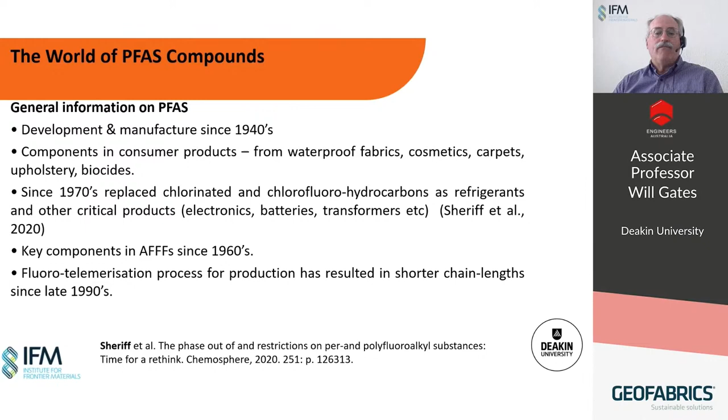PFAS have been manufactured and used since the 1940s. They are amongst the post-war wonder chemicals, and many aspects of modern society's creature comforts rely on PFAS. Since the 70s, PFAS have largely replaced chlorofluorohydrocarbons as refrigerants and in other critical products. As we're all aware, they have also been key ingredients in aqueous film forming foams for suppressing and controlling petroleum fires. Lately, since the 90s anyway, the shorter carbon chain length forms have become more prevalent, due to changes in production.

Widespread production and use and the long-term environmental lifetimes of PFAS mean that PFAS can bioaccumulate and biomagnify. Legacy production of PFAS and its use remain key ongoing exposure sources.

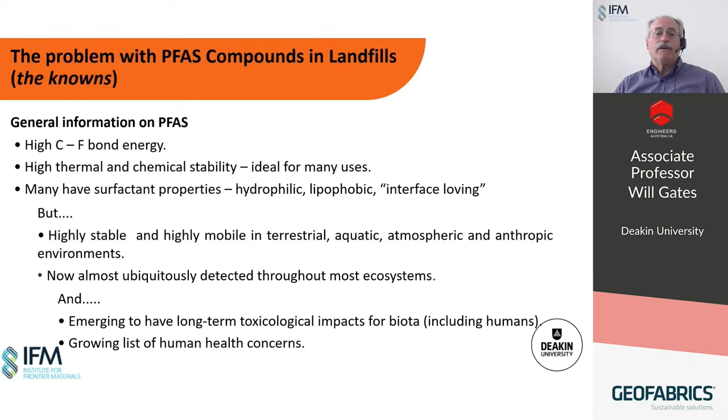The properties of PFAS compounds, which have made them useful across a broad range of consumer and household products for many years, including the carbon and fluoride bond strength, thermal and chemical stability, and surfactant properties of PFAS, also make them long-lasting, very mobile, and nearly ubiquitously present across terrestrial, aquatic, atmospheric, and anthropic ecosystems. These same properties also make them of concern for their toxicological impacts on the environment and on human health.

Listed here are some of the more common PFAS compounds. Solubility is generally in the part per million to part per thousand range. pKa's are generally strongly acidic, meaning that most of the PFAS compounds are present in their anionic forms in most environments. The pKa is basically the pH at which half of the PFAS compound is in its free acid form and half of it is in its anionic form at equilibrium. The critical micelle concentrations generally are higher than their environmental concentrations.

Notable exceptions to that rule are PFOA and PFOS, which are all ingredients in AFFFs. The CMC is the concentration at which PFAS will partition into its own phase, and so this has a big impact on its ability to form films as well as to be present in interfaces.

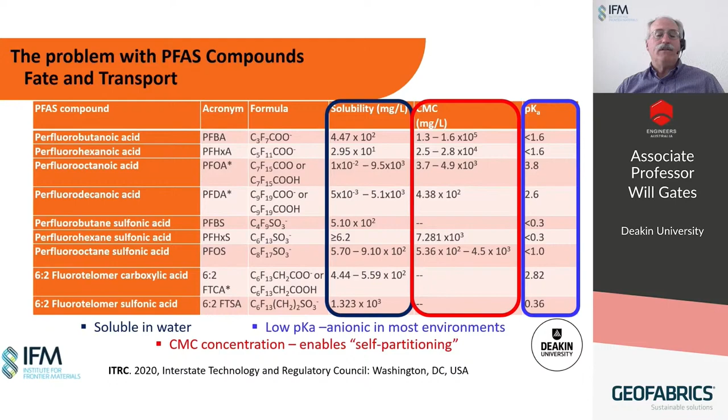In most cases, we can expect the PFAS to be highly mobile and ubiquitously present in its anionic form in most environments. Those environments preclude its adsorption and basically maximize its mobility.

Shown here is a schematic on the interplay between the various ecosystems or the environments in which PFAS are known to have an impact. While regulation has reduced the direct source pollution of PFAS into the environment, considerable PFAS transfer still occurs via our built infrastructure, collectively called the anthrosphere or the anthropic environment. So as scientists, it's our duty or our task to ensure that landfills and other systems within our control are effective in minimizing the further transfer of PFAS into the terrestrial, aquatic, and atmospheric ecosystems.

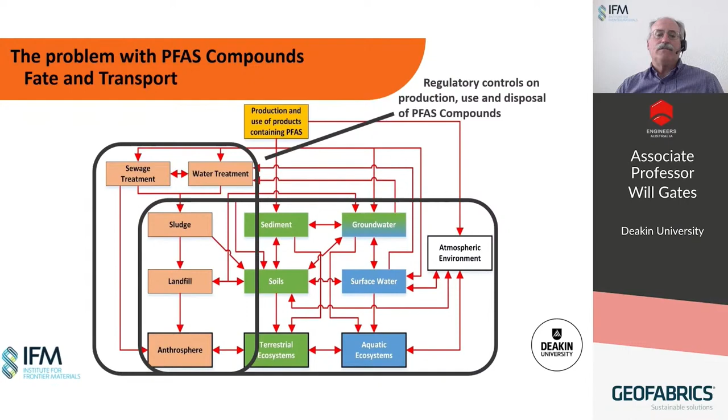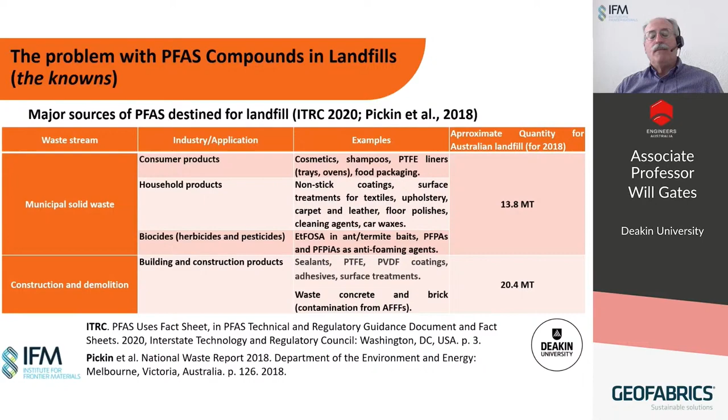Modern consumer and household products are large contributors to PFAS in landfill. For example, in Victoria, upholstery and vehicle interiors are really important sources. Building and construction products, such as sealants and waterproofing, make up most wastes that contain higher amounts of PFAS. In construction areas, concrete and brick wastes are usually contaminated by PFAS and thus can become a source of PFAS in the landfills themselves.

The concentrations of PFAS observed in Victorian landfills hold generally true across Australia as well. These relatively recent findings compare the operating landfills with closed landfills and with different waste streams. The age of the landfill and whether or not it is operating are both highly relevant with regards to the potential for PFAS migration, and this basically reflects changes in PFAS production, use, and disposal in response to regulation.

So going back to that table, we can see that if we compare the operating landfills on the left with the closed landfills on the right, we see much higher concentrations of nearly all PFAS compounds listed across the board.

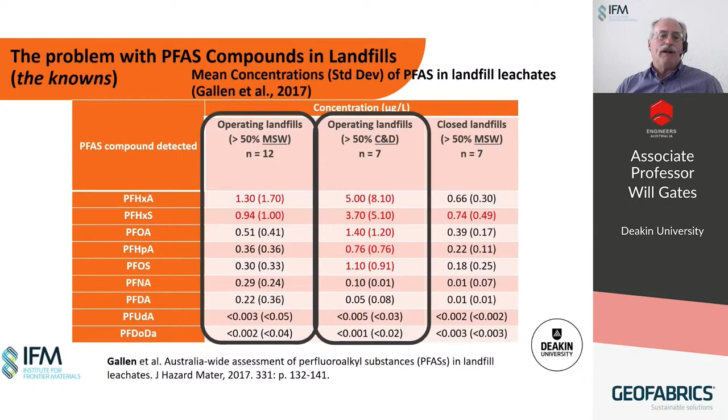We also can state that wastes that come from construction and demolition remain a main source of PFAS in landfills. Returning to that table, the center column, which shows the operating landfills accepting construction and demolition wastes, have much higher concentrations of PFAS than the operating landfills that accept municipal solid wastes.

Other important findings from these reports show that the associated chemistry of leachate is highly relevant for impacting PFAS migration. In other words, a high pH of leachate ensures that the ionic form of the PFAS dominates. If there's a high organic carbon loading in the leachate, either in the form of dissolved organic matter or particulate organic matter, then that will enhance the PFAS loading in the leachate.

So that brief overview tells us a little bit of what we know about PFAS and wastes and in landfills in Australia. How do we now begin to control their fate and transport? How do we keep them from getting into the environment further from the landfills?

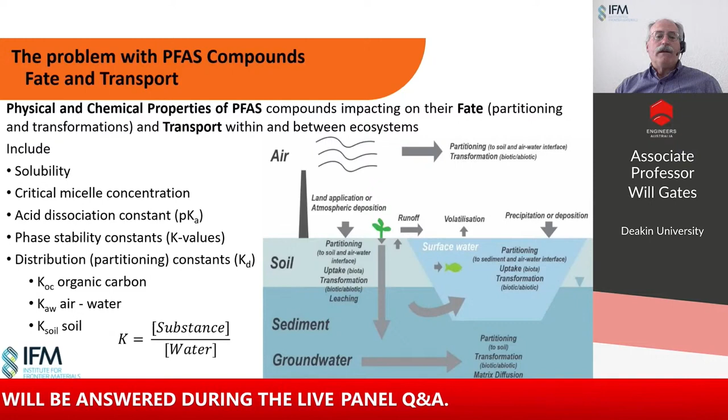In order to do that, we need to understand a bit more about their physical and chemical properties, such as their solubility, CMC and pKa, which we already have talked about, but also their equilibrium and stability and partitioning coefficients, and how these impact on their mobility at interfaces between phases and across these ecosystems.

For compounds like PFOA and PFOS, whose critical micelle concentrations and water solubilities are on a par, a key parameter for their partitioning and migration in the environment is their ability to concentrate at the interfaces. These interfacial micelle and hemimicelle films concentrate the PFAS at the interface, which then drives concentration-dependent equilibrium processes such as diffusion, adsorption, desorption, and partitioning to all the various phases.

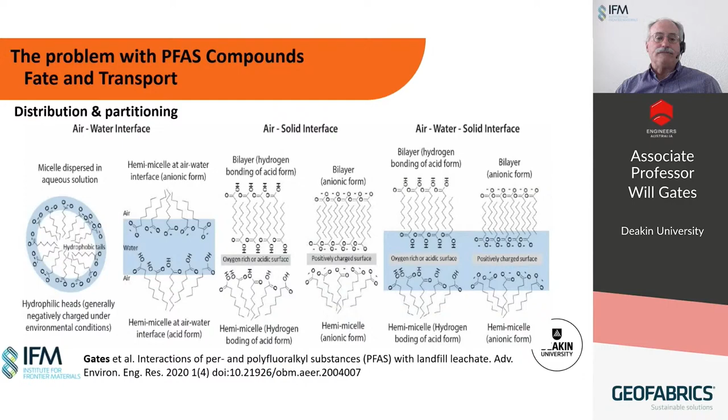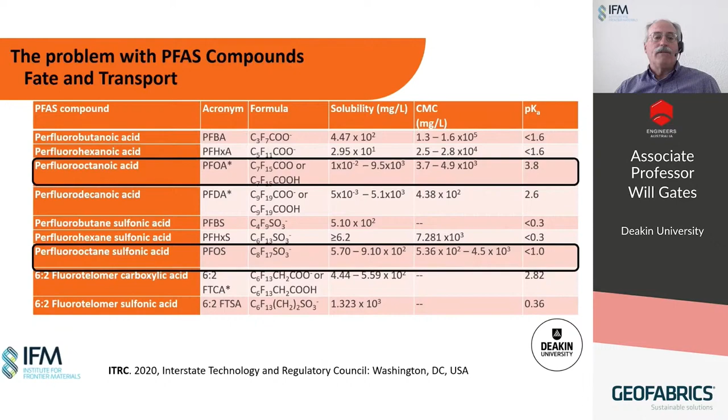And these mineral lining systems that we're going to now talk about include compacted clay liners and geosynthetic clay liners. So the main aspects of compacted clay liners that are important for their function are their mineralogy, their associated surface properties, their thickness, their density, their porosity, and their hydration status.

The mineralogy and surface properties, such as surface area, surface charge, and surface acidity, impact how the PFAS itself will interact. For clay minerals with a permanent net negative layer charge, such as bentonites or the montmorillonites within bentonites, the adsorption of PFAS is largely limited to cation bridging because they basically exist at concentrations below the CMC, but at pHs above the pKa.

Minerals such as allophane have a variable pH dependent charge, but a high point of zero charge, meaning the pH at which the net variable charge is zero is fairly high. So we can expect direct ionic interactions of the anionic forms to occur because the surface charge is net positive and the PFAS is predominantly in its anionic form. For example, allophane at pH 6 would be net positive, but most PFAS compounds would be anionic.

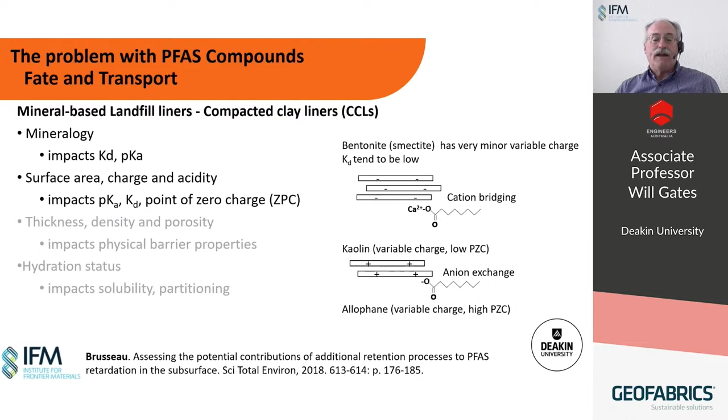Compacted clay liners should typically be a minimum of 600 millimeters thick, but the thickness only goes so far. Low saturated hydraulic conductivity is highly dependent on the compaction density and the low porosity that results from compaction, and that imparts a high degree of tortuosity on the liner system. Thus, the physical texture or microstructure of the liner is key to limiting the advective and diffusive transport of PFAS.

In general, this will only serve to retard the migration of PFAS, but not stop it. From purely physical transport to limit PFAS to 30 years or so, a compacted clay liner must have a saturated hydraulic conductivity in the low 10 to the minus 9s or lower, or have a thickness approaching 5 meters thick. I think you'll all agree that a 5-meter thick compacted clay liner is pretty much impossible, certainly not economic to produce for a landfill.

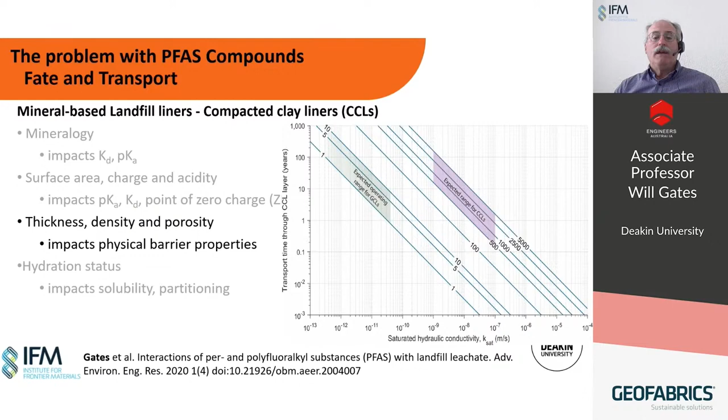However, for a geosynthetic clay liner, typical saturated hydraulic conductivities are in the 10 to the minus 11 meters per second. And if we can achieve that, as well as having a 10 millimeter thick liner, then we can achieve a 30-year retention time in that liner.

A final important consideration for mineral systems is their hydration status. Saturated conditions tend to promote the presence of PFAS in the water column and preclude its presence in the interfaces, at least in the interfaces with the mineral phases. Unsaturated conditions do promote those interactions with the interfaces. So water-mineral, air-water, and air-mineral interfaces become important for PFAS partitioning. However, the jury's still out in terms of how that is actually interacting and controlling PFAS migration.

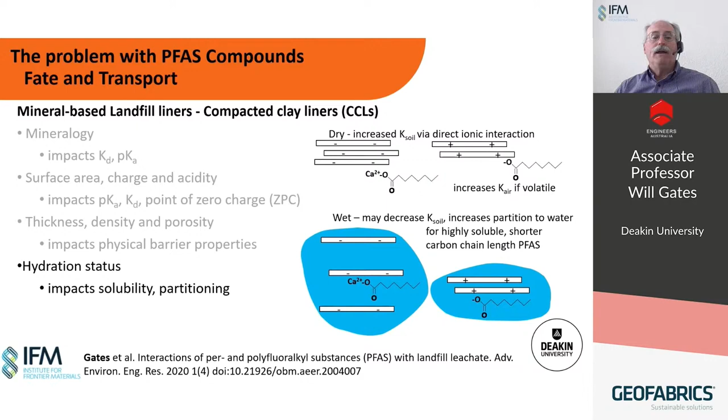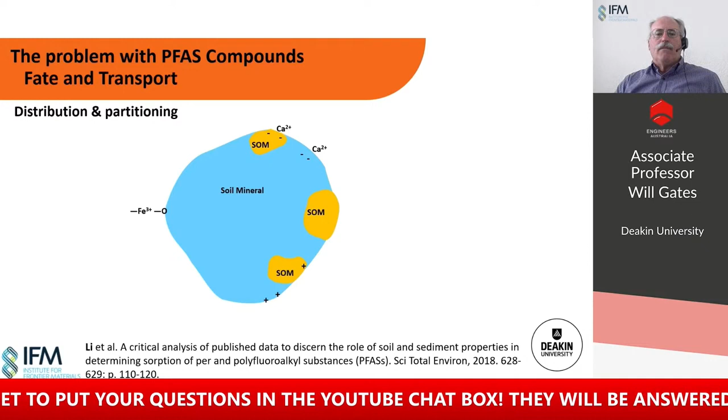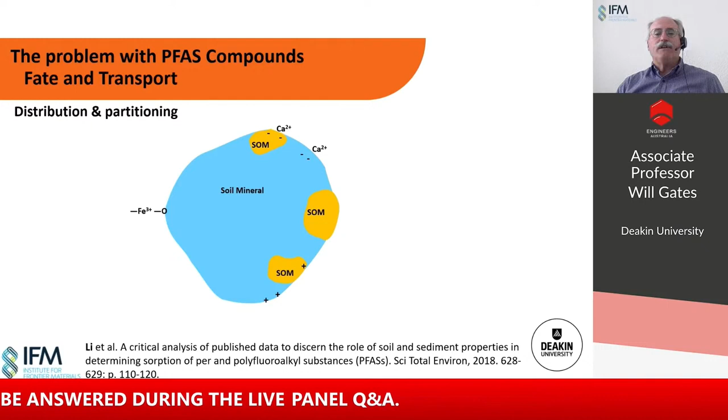Because organic carbon is present in many compacted clay liners in the form of natural soil humic materials, we can expect some interaction of the PFAS compounds with these. Soil organic carbon will have generally high cation and anion exchange capacities, a large pH range at which these variable charges can occur, and high surface areas and associated porosities that are all responsible for PFAS adsorption and retardation interactions in compacted clay liners.

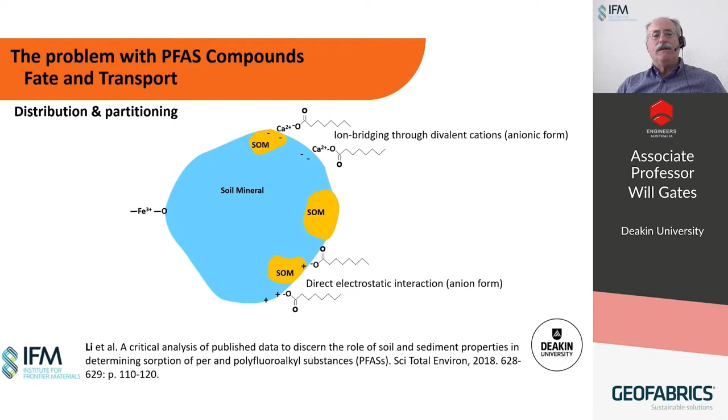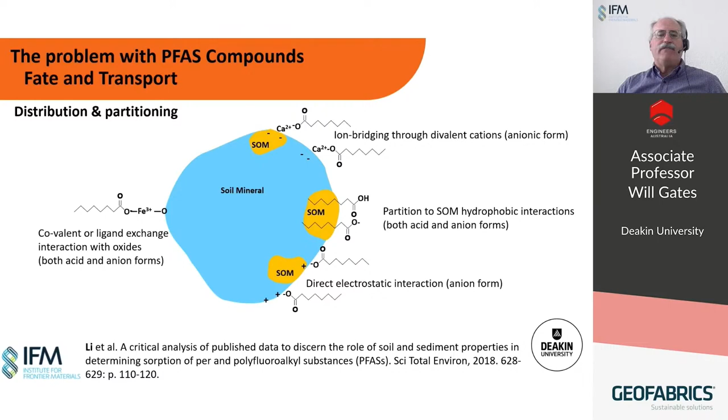The various forms of interaction result in ion bridging. So if there's a positively charged organic carbon, you can expect to see some ionic bridging, just as we saw for the positive mineral form. We also have direct electrostatic interactions, which would be important where the pH is above the pKa of the PFAS compound. In situations where the pH is not above the pKa of the molecule, other adsorptions such as phase partitioning interactions can take place. Covalent bonding, such as directly to surfaces, appears to be fairly rarely observed for PFAS compounds.

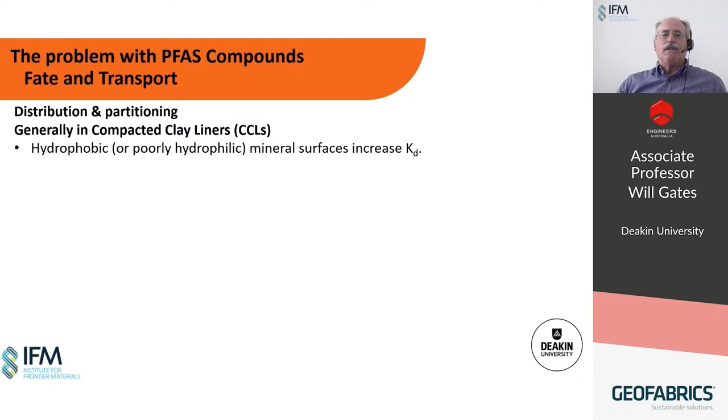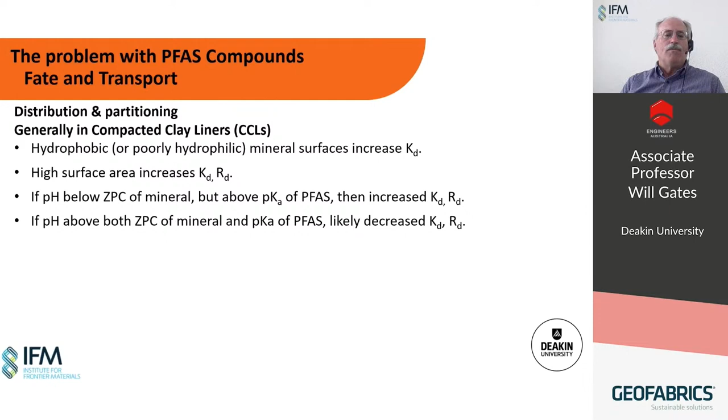So to recap, the physical and chemical properties of mineral surfaces impact the adsorption and thus the fate and transport of PFAS. If they're hydrophobic or poorly hydrophilic, or have a high surface area, we can expect the distribution coefficient will go towards the mineral surface, resulting in retardation. If the pH of the solution or leachate is below the point of zero charge of the mineral, we can expect the PFAS to be adsorbed if its pKa is low. If the pKa is high, adsorption onto the mineral surface will be lower.

We can expect that the actual thickness of the liner itself is going to be very important for prolonging transport time, just by virtue of the fact that we have a large amount of tortuosity, which is also related to the density and lower porosity of the lining system. Wetter lining systems will likely result in a decrease in partitioning to the mineral surface and an increase in partitioning of the PFAS into the water column. Drier materials, we'd expect the opposite, but the jury's still out because we don't really have enough information on that yet.

The presence of organic carbon in the mineral systems is very important. Basically, a thick, highly compacted, low porosity lining system with a high amount of variable charge minerals, including organic carbon, is going to be an ideal situation for PFAS adsorption.

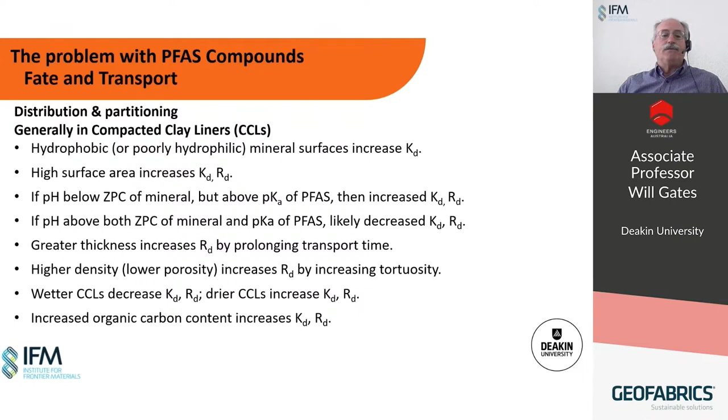Geosynthetic clay liners, though, are different. In a geosynthetic clay liner, you have smectite or montmorillonite as the main mineral component of the bentonite. We don't expect them to have a large impact on the adsorption and retardation of PFAS transport, certainly not much more than what we see for compacted clay liners. Our recent experiments basically show this to be the case.

The difference, again, is that our geosynthetic clay liners have a much lower saturated hydraulic conductivity because we can manufacture them in such a way that we have low porosity, high density, and a high tortuosity.

So what we found is with standard GCLs, we only have a minor retardation of PFAS. Part of this is because the tests are done under saturated conditions. If we actually conducted the tests under unsaturated conditions, we would expect to see a difference in the way PFAS is moving through the system. We don't have that information at this time yet.

If we modify the GCLs with organic carbon additives, such as activated carbon, we do observe some retardation of the breakthrough for the longer chain PFASs. We see a drop in the first few pore volumes of flow. However, if we look at the total PFAS loading, it increases again.

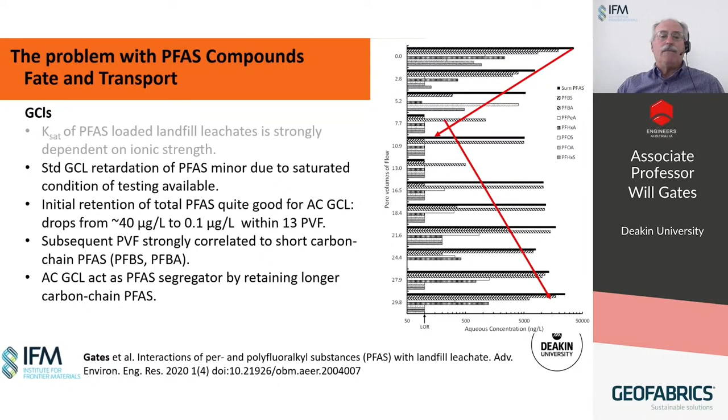This is going to be important for understanding when we design future landfills. I think it's really important at this point to point out that it's important to have landfill leachate collection systems associated with these types of lining systems. That brings us to the modern composite liner systems, which would take into account multiple barrier systems and leachate collection systems.

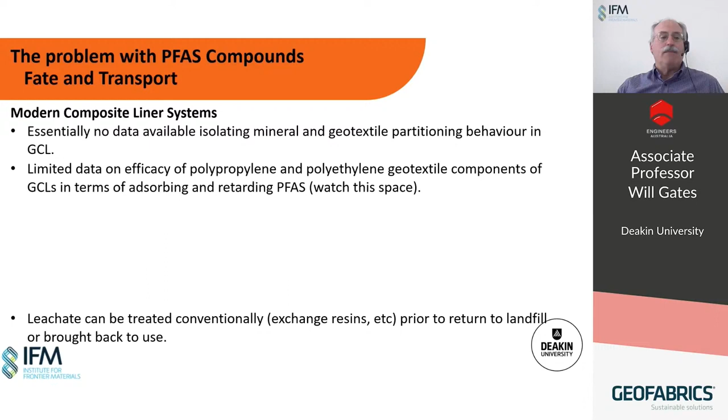There's still a lot of information we don't know about how PFAS migrate in the modern composite lining systems. We have limited data on the efficacy of the various plastics associated with geomembranes, for example, in retaining PFAS. Most of the lining systems that have been developed did not have PFAS in mind when they were developed. They do seem to have, for example, HDPE geomembranes do seem to have fairly good effectiveness. So we're at least lucky in that regard.

I think it's really important to point out that the geosynthetic clay liners and compacted clay liners should only be considered as secondary or even tertiary lining components in the protection of the environment against PFAS from landfill leachates. Again, reiterate that leachate collection systems should be advised, and we strongly advise double composite liner systems where the primary geomembranes and subsequent geosynthetic clay liner systems work in tandem.

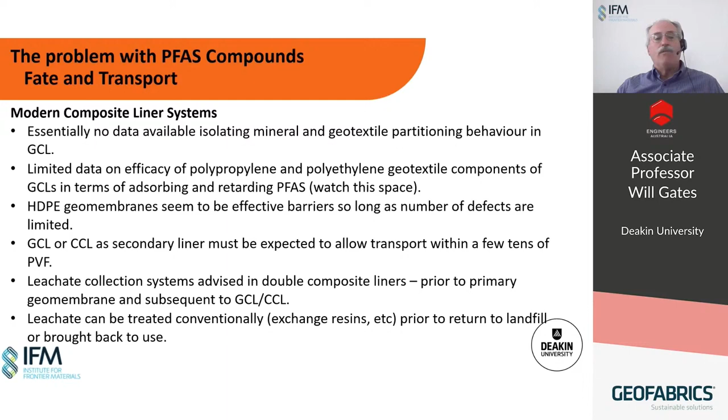The leachates in the leachate collection systems should also be considered to be treated for removal or destruction of the PFAS. So you're basically over time reducing the load in that landfill.

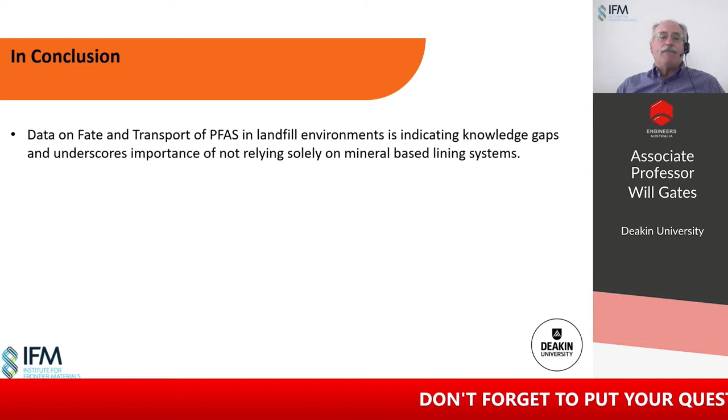So I guess in conclusion, there are many knowledge gaps that are still associated with PFAS migration through mineral liner systems. What we do know is that we should not rely only on compacted clay liners and geosynthetic clay liners for their retention of PFASs.

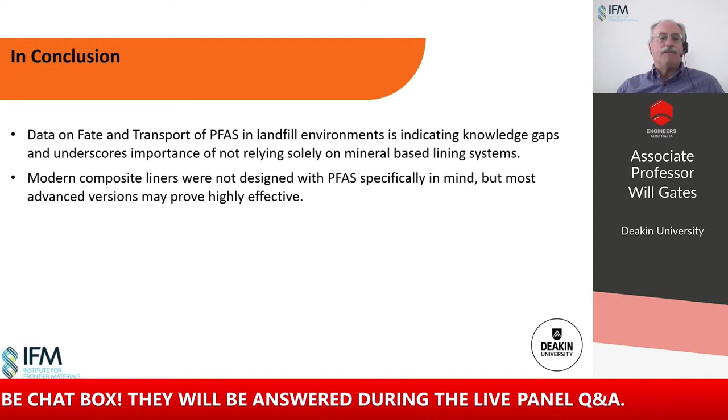Again, the modern liner systems were not designed initially for PFAS specifically in mind, but our most advanced versions may prove highly effective. The efficacy of the hydraulic barrier systems and the components for containing PFASs are expected to improve with further research and development.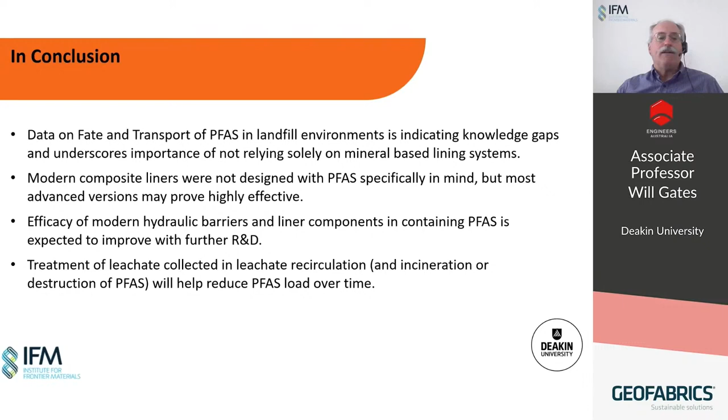Treatment of the leachate system should be considered, and given that PFAS compounds have a long half-life, I think we should also consider destruction of the PFAS that's collected from the leachate collection, rather than returning it back into the landfill itself.

The title of my presentation today is The Development and Performance of a Hybrid Geosynthetic Clay Liner for the Attenuation of PFAS in Landfill Leachates.

My name is Daniel Gibbs, and I'm the General Manager of Technical Research and Innovation at Geofabric's Centre for Geosynthetic Research, Innovation and Development, also known as the GRID.

Let's do a quick review of Per and Polyfluoroalkyl Substances, or PFAS. PFAS are a group of chemicals effectively made up of a fully or partially fluorinated carbon chain, or tail, and a functional head group. With the carbon-fluorine bond being one of the strongest in organic chemistry, some of the more salient properties of PFAS include being repellent to water and oil, and extreme thermal stability.

Because of these properties, a wide range of chemicals have been developed over the last 70 years, which have seen widespread application and proven quite useful to us humans, such as non-stick cookware, fabric, furniture, and carpet stain protection applications, food packaging, some industrial processes, and at least historically in Australia, some types of firefighting foams.

Unfortunately, because we're constantly exposed to a wide range of chemicals in our everyday lives, and because there are so many PFAS in existence, large-scale epidemiological assessments on individual PFAS are very challenging. What we do know is that generally, at least for the longer chain variants that have been studied, such as PFOA, they're very persistent. They can bioaccumulate and biomagnify through the trophic web. They've been linked to the development of certain cancers and have been nominated as endocrine disruptor and immunosuppressant chemicals.

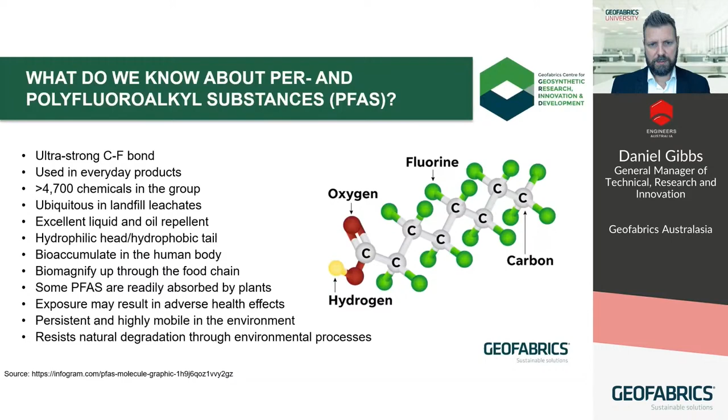Let's have a look at some of the ways PFAS find their way into the environment. They can be directly released from manufacturing sites using fluorinated chemicals in their processing, in agricultural crops irrigated with wastewater containing PFAS, aqueous film-forming foams, and consumer products containing PFAS like carpets, food packaging, ski waxes, etc., which ultimately find their way into landfill.

This is exactly the reason why we need to talk about PFAS in landfill leachate, with a specific focus on the performance of the lining materials used to inhibit the transport of these chemicals into the surrounding environment.

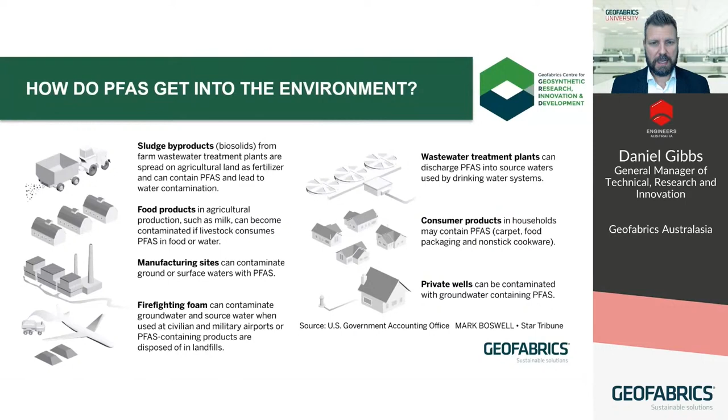Let's not forget the major exposure path for humans for these chemicals is ingestion, which includes consuming contaminated food or liquids, or simply breathing contaminated dust, which can accumulate inside our houses and offices, where we spend large amounts of time. So with all that incoming waste, which we saw in Will's presentation, we can see the necessity to generate some guidance around acceptable maximum limits for landfills.

This guidance now exists thanks to the development of the PFAS National Environmental Management Plan, or NEMP, currently in its second version, created by the heads of EPA in Australia and New Zealand. The document gives practical guidance around the maximum acceptable levels of the three most studied long-chain PFAS, with different levels applied to the different types of lining systems employed by the landfill.

Single composite lined landfills have a maximum leachable concentration of just 0.7 micrograms per litre in liquids, or a total concentration of 50 milligrams per kilogram in solids, for PFOS and PFHxS individually or combined, and up to 5.6 micrograms per litre in liquids, or again 50 milligrams per kilogram in solids, for PFOA.

Obviously, the acceptance criteria can be applied to bulk loads of relatively uniform materials, such as excavated soils, prior to acceptance by a landfill. But when it comes to MSW waste or certain C&D waste, pre-acceptance testing is virtually impossible.

So the only visibility we have on PFAS in these cases is to look at the levels in the leachate from the current waste stream. This is helpful in providing some lining design guidance for the construction of future cells and also leachate ponds.

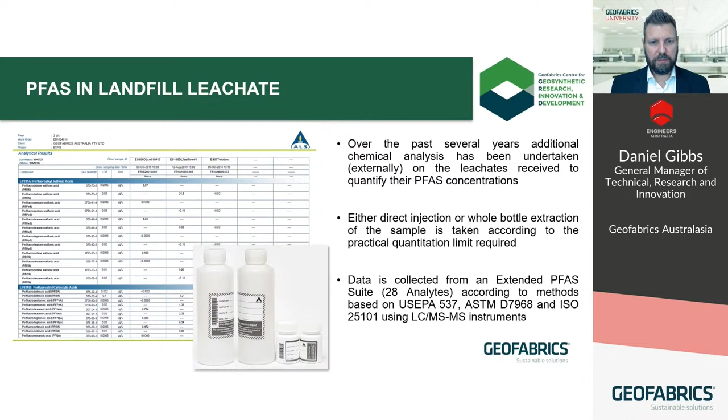Landfill leachate is a complex matrix of organic and inorganic chemicals which can make testing for these PFAS analytes a little more challenging than standard groundwater analysis. Still, there are a couple of standardized test methods employed, including direct injection or whole bottle extraction, depending on the matrix. Both of these give us a reasonably accurate picture of the amounts of PFAS in these liquids.

It's interesting to note that all but one of these leachates had higher than the maximum allowable levels of PFOS and PFHxS allowed by the NEMP for single composite lined landfills, but they were generally within the range for double composite lined landfill systems, which are a lot more expensive to build and CQA.

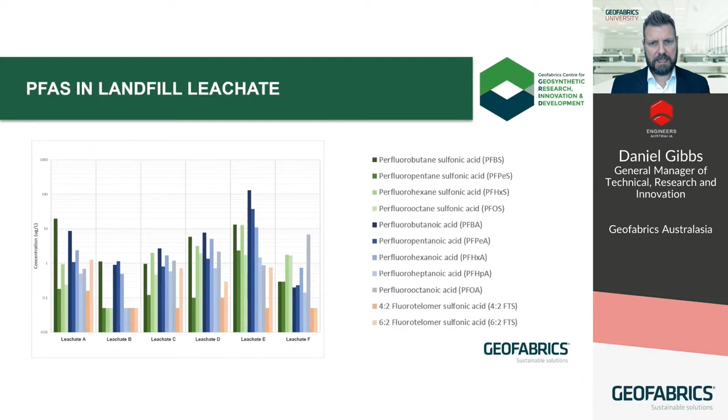Now, you may think, as a supplier of geosynthetic lining materials, this may sound like an opportunity, but what if we could design a single composite lining system which would reduce the PFAS levels passing through the system to below the NEMP acceptance criteria for single composite lining systems by simply changing one aspect of the system? Before we get into that, there are a few key things we need to talk about to provide some context around lining design.

Firstly, given that we know there is PFAS in our landfill leachates and that it can concentrate with time, looking after these landfills long-term is critical, with most environmental authorities requiring at least 30 years of post-closure care. By this point, for well-designed modern landfills at least, there should be little to no leachate generation.

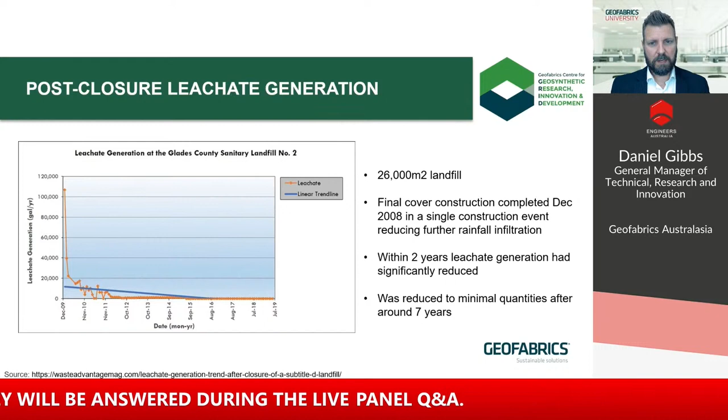The good news for landfill operators from a leachate collection and treatment point of view is that leachate generation has been shown to slow dramatically post-closure. In this specific example of a landfill in Glades County, Florida, leachate generation dropped significantly within 2 years post-closure and then fell to virtually nothing after just 7 years. Obviously this may not be the case for all landfills, but it gives us some general insight into how long leachate may need to be managed post-closure.

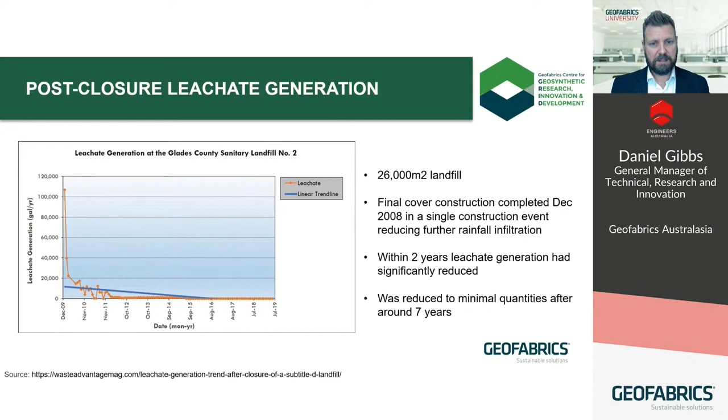This is an important point to consider when discussing the hydraulic head potential and timeline of the required performance of basal liners, and in particular GCLs.

Which brings us to the design of the lining system. In Australia, an accepted landfill liner and cap design includes a single composite liner consisting of either a compacted clay or a geosynthetic clay liner, overlain by a geomembrane. For critical applications, this system can also be doubled up. The improvement in hydraulic performance of a composite lining system over and above the individual components is well documented.

But what about the transport of PFAS? There's been some recent work carried out by researchers here and overseas, which has shown that while PFAS can form micelles, as we saw in Will's talk, at higher concentrations and reasonably readily diffuse through the amorphous regions of polyethylene geomembranes, diffusion may be very low for the concentrations we find in a typical landfill setting.

There's a body of work being undertaken at present here in Australia, which looks to quantify the effects of PFAS on lining materials such as HDPE geomembranes and GCLs. This includes not just looking at how these chemicals move through the system from a hydraulic point of view, but also any detrimental effects such as stress cracking, which may occur over time with exposure to PFAS, because it's a surfactant. But based on our current body of knowledge, let's assume that PFAS quantities in landfill leachate are low enough to reduce diffusion through HDPE geomembranes to very low levels.

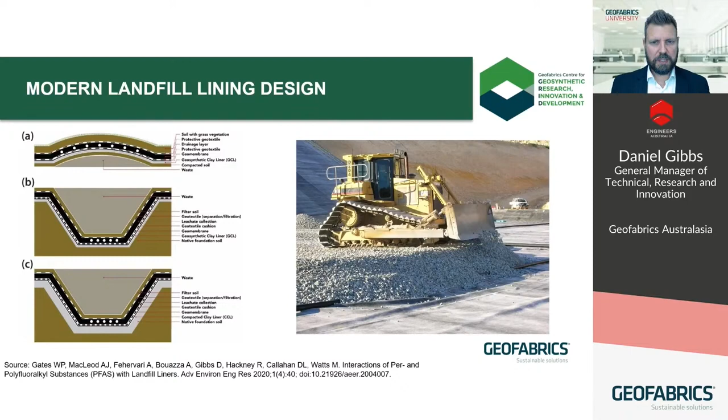That doesn't let us off the hook, though. What happens if the geomembrane has a defect or a hole? Then diffusive flux gives way to advective flux, and we now need to understand how liquids containing PFAS interact when in direct contact with the GCL components, in terms of the impact on hydraulic performance and whether or not these chemicals are trapped in the bentonite, which has a history of being generally pretty good at trapping certain contaminants like heavy metals.

We test the hydraulic performance of GCLs with deionized water to ASTM D5887, and the compatibility of many other solutions, including landfill leachates, with GCLs using ASTM D6766. These methods have specific set point values in terms of the confining and hydraulic head pressures, which interestingly were originally set with quality control in mind more so than around specific performance criteria in end-use applications.

The pressures were selected to ensure the specimen could be confined and back pressure saturated using a hydraulic gradient that would produce a flow so that measurements could be made in a reasonable time period for QC and commercial labs. These specific pressures were reached by consensus at the time and only meant for comparing one GCL specimen to another based on the standard.

This includes changes to overburden or confining stress, hydraulic head pressures, and the composition and concentration of the permeating liquid. So for example, while the confining pressure may be similar in a landfill cap, if you have a relatively medium to low permeability soil in conjunction with a geocomposite drainage layer over the geomembrane and a mild slope, your hydraulic head potential is reduced to almost nothing.

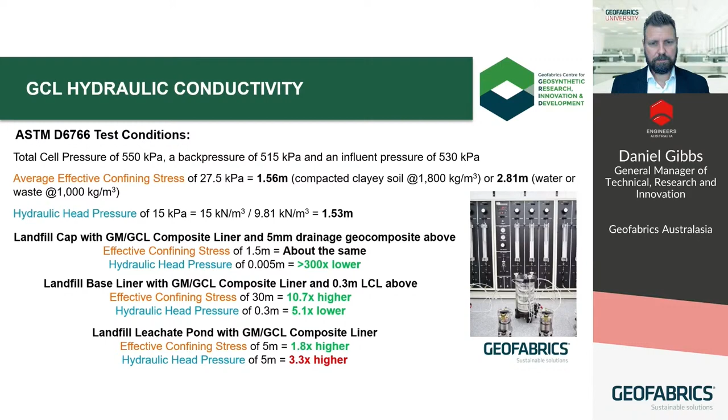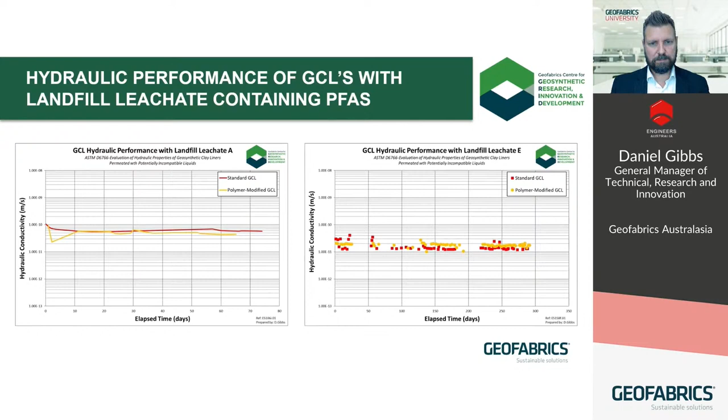These results are within the bounds of many of the Australian landfill leachates we've tested over the years. So hydraulically, at least, we see that the PFAS itself, at these microgram and nanogram levels, doesn't appear to affect these GCLs in terms of their hydraulic performance. But what about their ability to trap PFAS?

In some of our early research studies, we quickly discovered that the bentonite core, while it generally has a reputation for reducing contaminant transport due to its low permeability, couldn't trap these three specific long-chain PFAS molecules very well in either standard or modified forms.

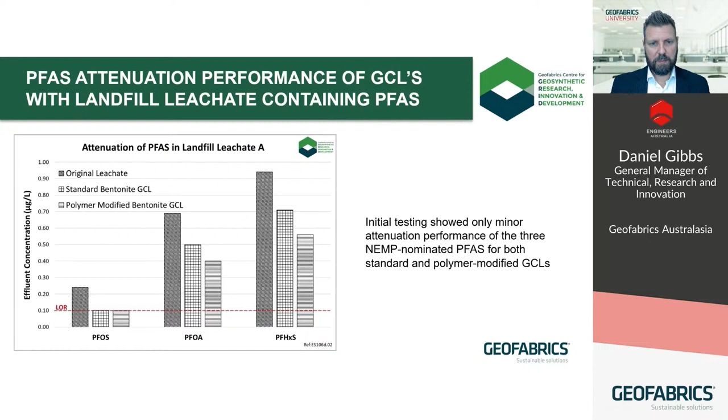Some of the uptake you see in these graphs, particularly for PFOA, could be linked to sorption onto the polypropylene synthetic components. We're investigating this further in a cooperative study with Monash Uni at the moment, so this could be included in a future webinar.

So really the question is, how do you trap PFAS? Well, there's a range of products available that can do this - ion exchange resins and other types of polymers. A number of these have been successfully employed by water treatment plants for many years.

One of them is activated carbon. Now, activated carbon is one of the most well-known and well-researched products available, with a proven potential to remove organic contaminants such as PFAS from liquids. It has a high affinity for hydrophobic compounds, which is why it works reasonably well to capture a range of PFAS given their hydrophobic tails.

Given the increased mobility of some of the shorter chain PFAS, one of the challenges with this product is that some activated carbons, at least, may not always effectively capture and hold onto some of these shorter chains to the same extent as the longer chain variants.

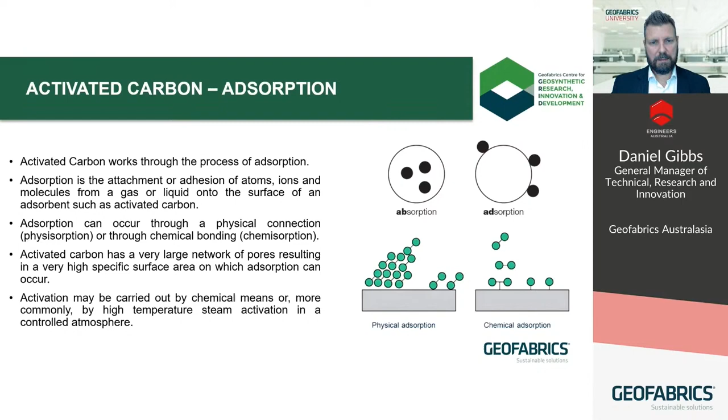So now we know how effective activated carbon can be. How do we select the most appropriate type?

Activated carbon can be made from pretty much any type of organic material, but ideally something with a high initial carbon content. Commercially, these are produced at scale from things like wood, coconut, and coal. You can also use waste materials such as apricot kernels and cherry pits. Different donor raw materials and to some extent different processing techniques result in different properties in the final product, such as specific surface area and porosity.

Porosity for these products is categorized in terms of their differing sizes, from tiny micropores less than about 2 nanometers in diameter, through to mesopores, which are between 2 and 50 nanometers, and macropores above 50 nanometers. Activated carbon made from wood generally has a larger number of macropores, while coconut shell-based activated carbon has a higher level of micropores. Coal is somewhere in between these two with a reasonably balanced porosity, having similar levels of each pore size. And this is an important distinction in the context of having a product which has the correct size and number of pathways required to maximize PFAS adsorption.

A further distinction is the type of coal used. Research by others has shown a higher PFAS attenuation capacity using bituminous coal over the younger lignite or older anthracite types.

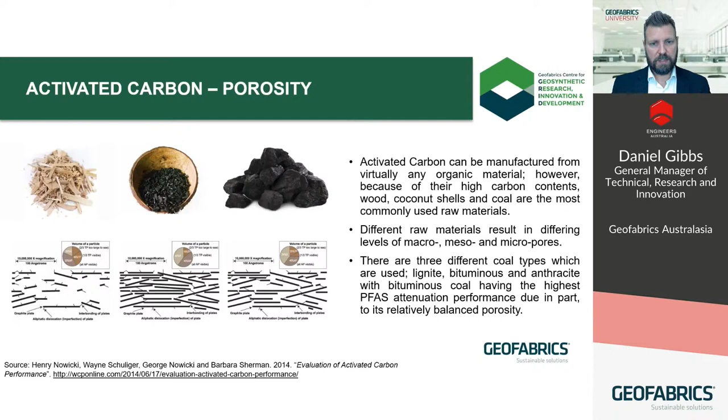So we selected a particular bituminous coal-based activated carbon, which had already been designed by the manufacturer to assist in the capture of PFAS molecules. And we recently carried out a kinetics and adsorption isotherm study through ADE to understand and really quantify the performance of the activated carbon in isolation of the bentonite component. We used a landfill leachate as the contact liquid because it had a range of potentially fouling co-contaminants, which are a very important consideration when looking at performance.

We looked at 2 different grades of the same product, one with a slightly lower overall surface area. The study involved things like reaction rates, equilibrium times using increasing amounts of activated carbon, desorption rates using pure water, etc. It's worth noting that the maximum addition rate of the activated carbon in this study was just 0.5 gram.

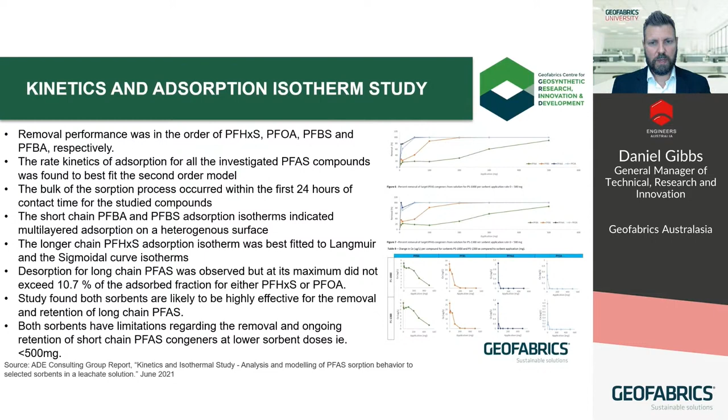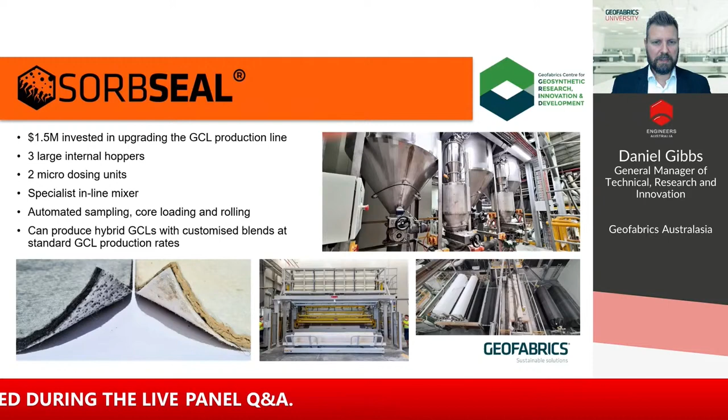So once we selected an activated carbon with the right properties and the right particle size, then we had to figure out how to manufacture with it. Prior to us spending around $1.5 million on upgrading the equipment, we ran several small laboratory trials and then larger scale online trials to qualify the product and the amount of activated carbon required to get that right balance between PFAS adsorption and GCL permeability using landfill leachates.

So when it came to designing the equipment, we knew how much activated carbon we wanted to have per square meter, how we wanted to mix it, and whether we wanted a selection of other potential materials to be added as the body of research around PFAS transport and materials science grew, both in our lab and generally around the world.

So we added 3 separate large hoppers for powders and also 2 special microdosing units for any polymers or other materials which we found to be effective in trapping long and short chain PFAS at low addition rates. We installed an automated sampling unit as well as a new core loading and rolling system. And this gave us a longer roll length capacity. And all of this really resulted in a great deal of future-proofed manufacturing and product design flexibility.

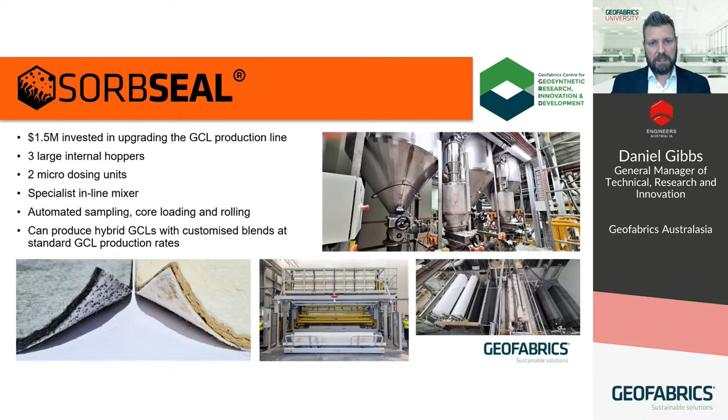The final result was a hybrid GCL product, which we named Sorbseal.

So if we now look at the long-term hydraulic performance over a few years, we can see a slight increase in permeability overall, but still in the 10 to the negative 11s. These particular Sorbseal GCLs had a typical addition of around 1 kilo per square meter of activated carbon and between 4 to 4.5 kilos of dry bentonite.

As I mentioned earlier, the PFAS in both leachates doesn't appear to have had a negative impact on the hydraulic performance. Going into this, we really wanted to preserve the permeability so that we remained within reasonable GCL leakage rates for design purposes, and we didn't want to disrupt the components of the GCL too much such that we'd need to rethink how we design with a completely new material or a certain aspect of the material.

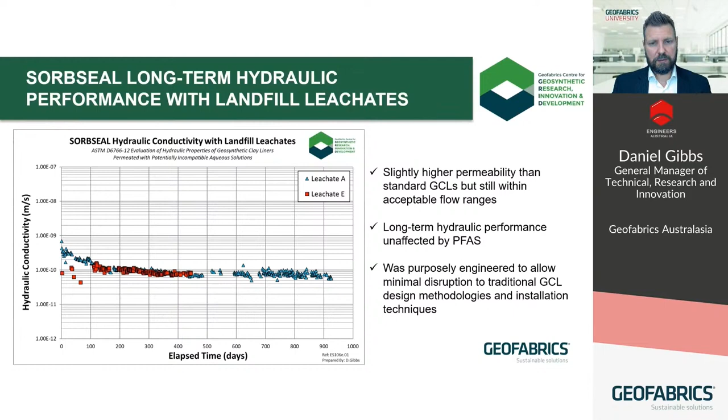So we know Sorbseal can retain good hydraulic performance over the long term in contact with landfill leachates, even with 1 kilo of activated carbon blended in, which is a non-swelling component. But how about the other critical aspect, the attenuation performance of PFAS over time?

Well, that was excellent as well, especially given that MSW landfill leachates are a chemical soup which contain a wide variety of co-contaminants alongside the PFAS, all competing for space on the surface of the activated carbon.

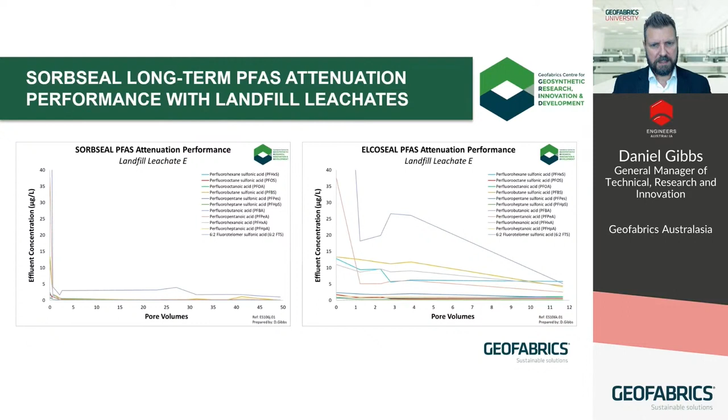The left-hand graph shows Sorbseal's ability to strip the leachate of a range of PFAS, both long and short chain, while on the right we can see the performance of a standard unmodified Elcoseal GCL without any activated carbon, showing some attenuation performance, but not nearly as efficient as the Sorbseal product.

So if we just focus on the three main long-chain PFAS nominated in the NEMP, we can see that Sorbseal is able to reduce the originally high levels of PFOS and PFHxS, which were outside even the 7 micrograms per litre maximum for a double-line system, to just less than 0.03 micrograms per litre after 50 pore volumes of flow.

Remember, this is permeated using actual leachate, and the conditions of the ASTM D6766 GCL permeability test method, representing 1.5 meters of simulated hydraulic head and a relatively low confining pressure.

This means that in the landfill baseliner and cap, where pore volumes through the GCL are likely to pass through more slowly due to either increased confinement and/or a lower hydraulic head potential, and the fact that leachate generation slows down dramatically post-closure, Sorbseal may very well continue to provide attenuation of PFAS both during the operational phase and for many years post-closure, even beyond the moment leachate stops being generated.

Naturally, this is dependent on the original PFAS concentrations in the leachate, the levels of co-contaminants, the other liner design elements such as the geomembrane, and how well these products were installed and CQA'd, etc. But the data certainly proves that it can be done.

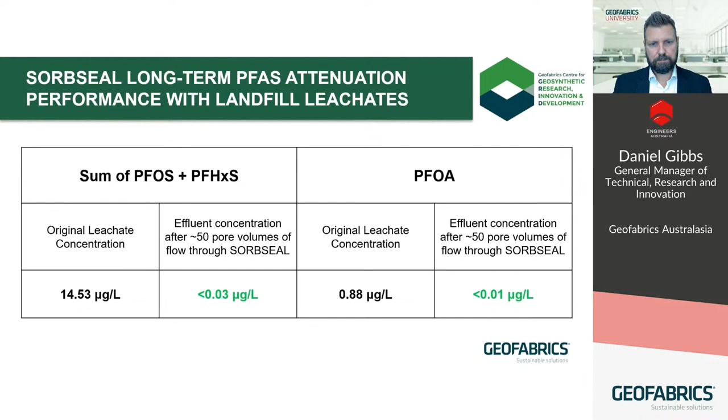And on the topic of CQA, let's take a look at the specification for Sorbseal S1000 and S2000 GCLs. As I mentioned earlier, we purposely preserved most of the well-known properties of the Elcoseal GCL range in terms of the bentonite properties, the synthetic component masses, free swell, fluid loss, which of course remain in line with industry standards.

We lifted the mass of the S2000 to a MARV of 4,000 grams per square meter, and that's in line with our research and the S1000 product. We've also slightly lifted the hydraulic conductivity to a MARV of less than 5 by 10 to the negative 11 meters per second, based on the data we've collected to date on these products. This could change, but that's where it's sitting at the moment.

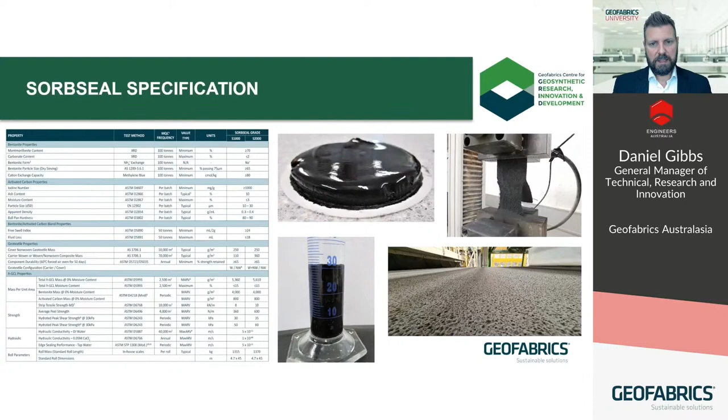Remember, that's a deionized water hydraulic value, not a leachate value, which could change depending on the constituents and concentration of the leachate. So that really leaves the main additions to the specification being around the activated carbon itself.

So we've added 6 new tests here, which are largely MQC tests that are carried out on every batch of the activated carbon, which, depending on the addition rate inside the GCL, could cover several thousand square meters. So if you're specifying Sorbseal, keep this in mind.

One of the most well-known tests on activated carbon is called the Iodine Index, or the iodine number, which we'll look at in a little more detail in a minute. Other than that, the other properties are really there to tell a story about the origins and, to some extent, the quality of the activated carbon.

For example, low ash, which is around 3 to 5, can indicate coconut shell activated carbon, but it's also indicative of acid-washed coal-based carbon. Coconut shell is harder, in the order of 98 to 99, and more dense than coal, ranging from 0.4 to around 0.54. So if you look at the combination of hardness, ash, and density, you can use this to determine the origin.

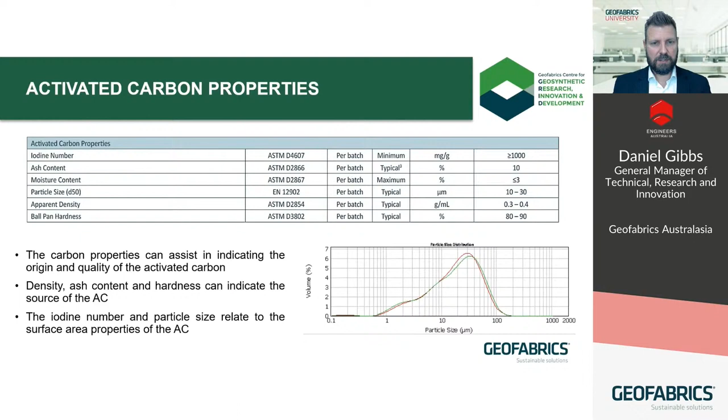Having a look at the iodine number is useful in quantifying the specific surface area or reactive potential of an activated carbon, in a similar way to how we use methylene blue titration to calculate the cation exchange capacity of the bentonite. There's a reasonably close relationship between the amount of iodine adsorbed and the total specific surface area. For every milligram of adsorbed iodine in the test, this roughly translates to 1 square meter per gram of carbon. So the minimum iodine number for the activated carbon used in Sorbseal is set at greater than 1,000 milligrams per gram, which translates to around 1,000 square meters per gram.

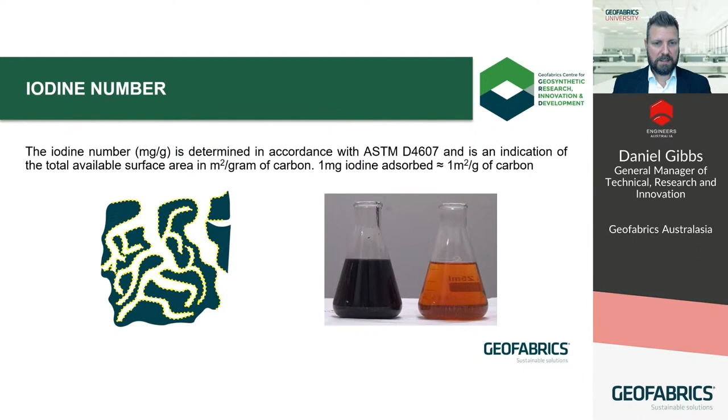We realized it was important to add a quantitative test for when it arrives on site, to determine the amount of activated carbon inside the blended powder for CQA purposes. That's where the percent carbon content test comes in. You can use either thermogravimetric analysis, or TGA, to quantify this, or you can use the quicker and cheaper, but by no means less precise, muffle furnace test.

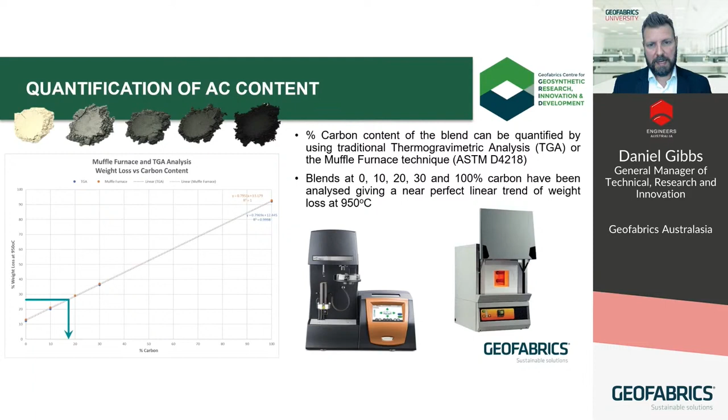You only need a gram of the blended powder to run the test, so this can be easily extracted from the GCL samples sent to the independent lab for CQA analysis, assuming the lab has a muffle furnace, of course. The result from the test is then converted to the amount of added activated carbon, and by extension the amount of dry bentonite, using a calibration curve developed based on a series of TGA and muffle furnace tests we carried out using pure bentonite, pure activated carbon, and different blend percentages of each material.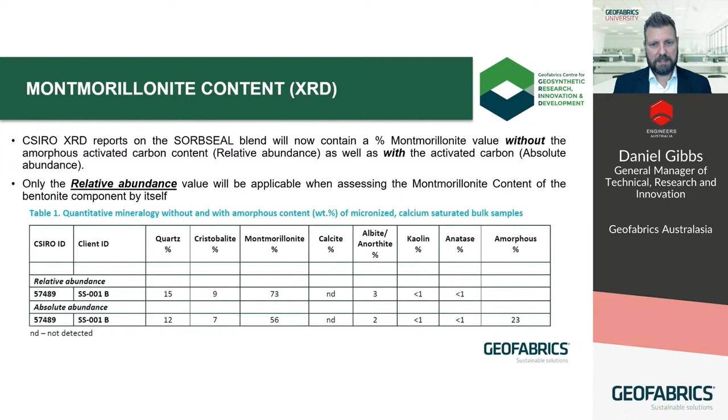Further to this, montmorillonite content analysis for the bentonite component via XRD has been embedded in our industry for many years as a staple quantitative test. You can either choose to have an independent lab collect bentonite directly from the sampling points online during production of the SORBSEAL, or you can send the blended powder from the GCL off to CSIRO, and they'll test the powder as a whole and give you two results: an absolute abundance and a relative abundance. If you're simply interested in the montmorillonite content of the bentonite, the value reported will be the relative abundance value, as this will have had the activated carbon component subtracted.

So that brings us to the end of the presentation. By way of summary, we saw that PFAS are ubiquitous in landfill leachates, largely due to the products which we buy, use, and that end up in landfill. We discussed the fact that the nominated pressures in the test methods for GCL hydraulic conductivity are largely used for QC testing, so the actual GCL flux may change depending on the application.

We talked about activated carbon and the process of adsorption, which can be highly effective in trapping organics such as PFAS through hydrophobic interactions. We looked at the hydraulic performance of standard Elcoseal GCLs with landfill leachates containing PFAS, showing minimal loss of hydraulic performance. We then explored the development of SORBSEAL and the ability to optimize the product for site-specific challenges using different raw materials. We saw that SORBSEAL can trap a wide range of PFAS in landfill leachates, which also contain a number of competing co-contaminants, over and above the standard Elcoseal GCL, with only a minor impact on the hydraulic conductivity.

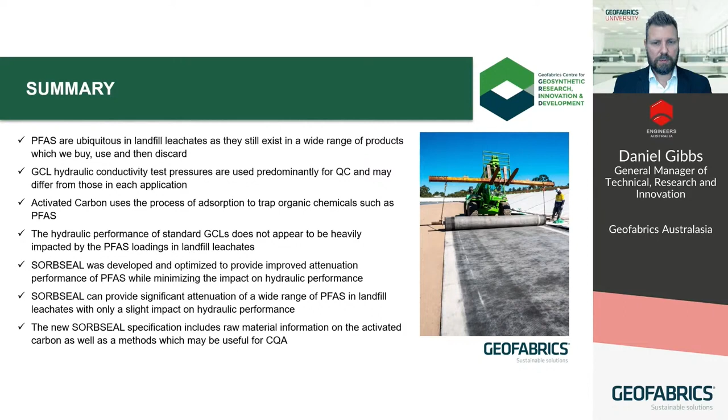And finally, we reviewed the new SORBSEAL specification, which lists a couple of the key raw material properties of the activated carbon, in addition to some of the methods which can be carried out by independent labs for CQA purposes. Other than that, thanks for your attendance. I hope you found the content valuable. If you'd like any further information about what you've seen here today, please reach out to me via email. Thanks.